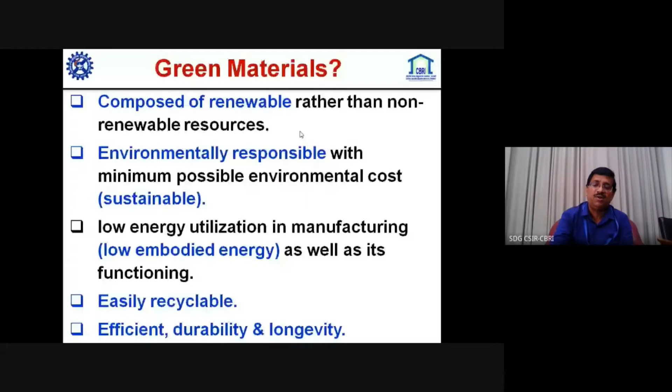So my main focus will be low energy utilization in manufacturing, so that the embodied energy could be minimum, as well as in its functioning. It should be easily recyclable, efficient, durable, and have long life. So those things are important. I'm not going to teach about that.

A different sustainability approach has been made, where environmental, social, and economic, all three come together, and that part is known as the sustainability part.

So if you look into the infrastructure as a whole, and sustainable goals, starting from the first goal, the total sustainable development goals are 17. From first to 7 come under enhancing access to basic services, and from 11 to 15, CSIR-CBRI is continuously working on promoting environmental sustainability.

So we are working a lot on waste utilization, new systems, so that less embodied energy material can be produced. And if you look from 8 to 10 and 16 and 17, those support inclusive growth towards sustainable development goals. So in these parameters, my talk will proceed.

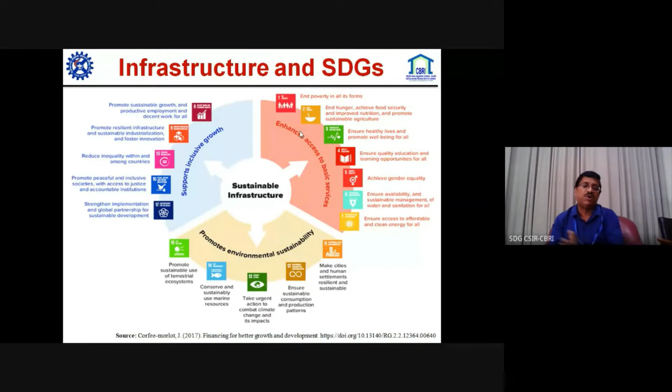What are the challenges before the construction sector? There are three major challenges. One is conservation of natural resources.

Second is energy conservation. So all the processes which have minimum energy consumption, those processes, and those technologies and materials which are energy efficient, that is the next issue.

Third one is reduction in greenhouse gas emissions. As you are aware, about 1 ton of cement production produces about 0.75 ton of carbon dioxide into the atmosphere. So that is a big issue, where every committee and people are working on how we can reduce greenhouse gas emissions from cement production.

A lot of work has been carried out in different parts of the country and the world. Initially efficiency was very poor - 1 ton of ordinary Portland cement production was producing about 1 to 1.2 ton of carbon dioxide, but it has been continuously reducing, and people are also working on different types of cementitious binders which require less temperature for calcination, using other sources.

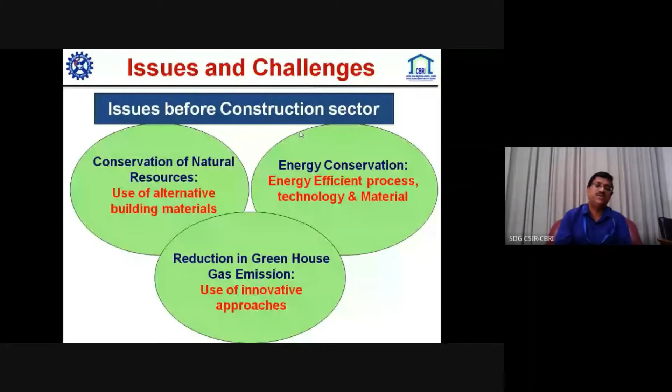My other colleagues will go into that in detail, so I'm not touching it, but definitely these are the concerns. Our main focus should be to reduce resource consumption, reuse resources, reduce environmental impact of cement production, and greater use of supplementary cementitious material.

That may be fly ash, silica fume, calcined clay, and other materials where less energy is involved during their production or application.

Recycle and reuse of construction and demolition waste, enhance the service life of structures - this is a major issue in our country, that we are making good buildings, good bridges, all these things, but the life of those structures is decreasing day by day due to poor quality concrete, construction problems, curing and other issues, and they start deteriorating at an early age, starting from 5 to 6 years, and within 10 to 15 years.

Corrosion and other issues have been emerging in a very faster way. So we have to look at whatever materials and technology we adopt, so that the life of structures can be enhanced, and overall the sustainability effects will be there.

Also research and use of emerging technologies - as we are aware, nowadays in our country a lot of work is being carried out towards the precast and prefab sector. Initially everything was cast in situ, and we were wasting a lot of materials, energy and other things. Right now, starting from bridges to buildings to highways to runways to pathways, everything is moving towards precast construction.

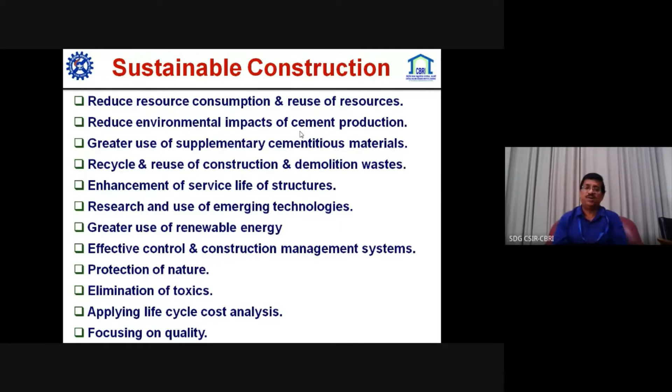And effective control of construction management system, protection of nature, elimination of toxics, applying life cycle cost analysis, and last but not the least, quality. So nowadays people are focusing much more towards the quality of constructions and other things.

I'm not going to just tell, but overall, if you look into the global energy demand and its consumption, particularly in Asia, it is increasing day by day. And we know a lot of infrastructure and other things are going on. So the main focus is how we can reduce the energy consumption in those areas.

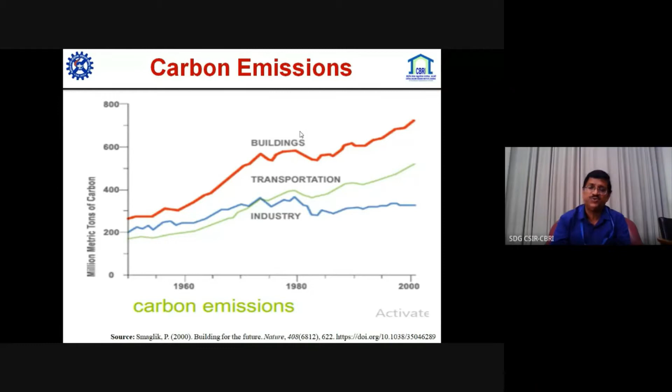Also, if you look into the carbon emissions in constructions, buildings, transportations and industries, it is all on the rising edge. So we have to reduce all those things in an effective manner. So coming forward, what we should do, these are the challenges. How we can come out with those challenges, that is the important factor.

So a major amount of carbon dioxide is being generated from calcination of limestone in cement clinker production. So that we have to minimize, and in CBRI we are continuously, our different groups are working on how we should address those things. Particularly if you look in India,

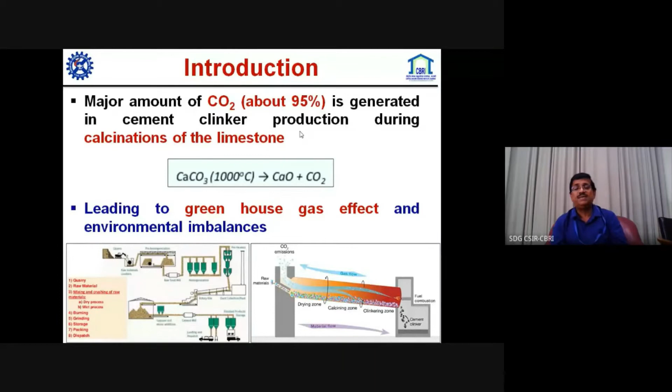NCCBM, they are working in a great way in this area, and continuously looking at what should be the alternative towards that. And that is the important factor, how we can reduce the greenhouse gas effect or emission of carbon dioxide into the environment, so that environmental balance can be maintained. So those are the important factors.

So what will be our course of action? Definitely our course of action should be that we should look for alternative binders, and that my particular group is working on. We have tried with the low heat calcination of lime sludge, which is available from paper industries and other industries.

Also my one student, she is going to present tomorrow on composite cement, where we are chemically activating steel slag, which is basically a very high crystalline material, and it has only been thrown away as garbage and not utilized.

So we are working, and other people will come. One of my colleagues, she will deliver on supplementary cementitious material. So that is the aim, how we are going to look beyond OPC, ordinary Portland cement, and how we have an energy-less consumed cementitious binder. So that was our aim.

As we are aware, I have already told that our reserves are very limited. If you look into the limestone, clay, shale, which is being used for OPC clinker production, Niti Aayog and all our MOEF and ministries, all those are behind that to reduce CO2 emissions and reduce the energy consumption in cement manufacturing.

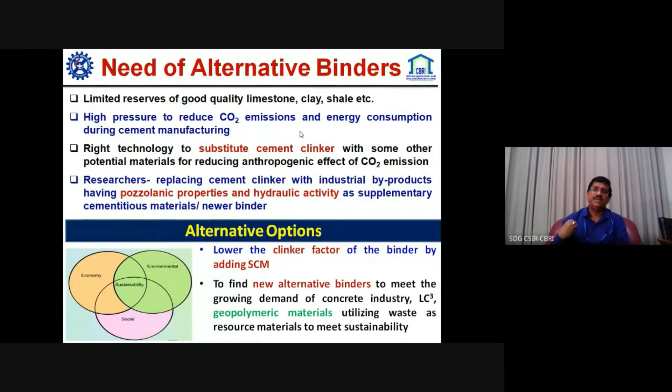Worldwide people are working on different types of binders, and work is going on, and somewhere in some European countries and also in China, some other cementitious binders were developed. But still, in our mind, we look into where will be the drawbacks. I have tried to list, not all, I have listed a few other types of binders, and also what may be the drawbacks, so that we can look and minimize that.

But if we are having good quality productions, that will be minimized. So if we talk about calcium aluminate cement, basically it is limestone and bauxite, and very limited calcination requirement is there. So energy consumption will reduce, and CO2 emissions will also reduce by more than 30%.

But sometimes people have observed, not all, that there was strength loss by conversion of metastable to stable hydrate. So during reactions, some strength losses were observed. Also, work has been carried out on calcium sulfoaluminate cement. It has been very good, but due to some free lime and other things, it has been observed to be a little bit expensive in nature, and in addition poor durability was reported.

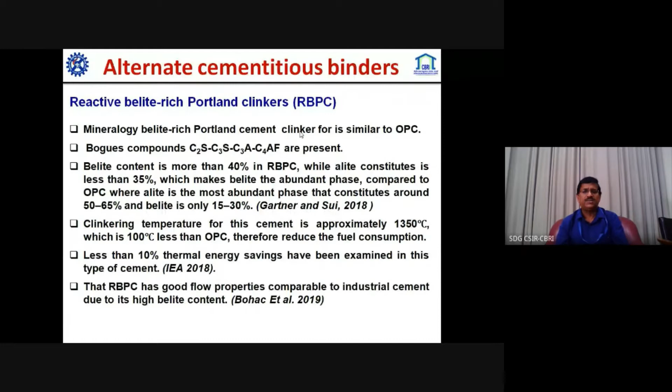Other cementitious binders are mainly working on belite rich Portland clinkers. We are modifying to C2S, which is belite, and reducing in an effective manner. By this way we are going to reduce thermal energy or energy consumption by less than 10%. And we are utilizing a high belite content. So this is some study people have carried out; our work is going on in this area.

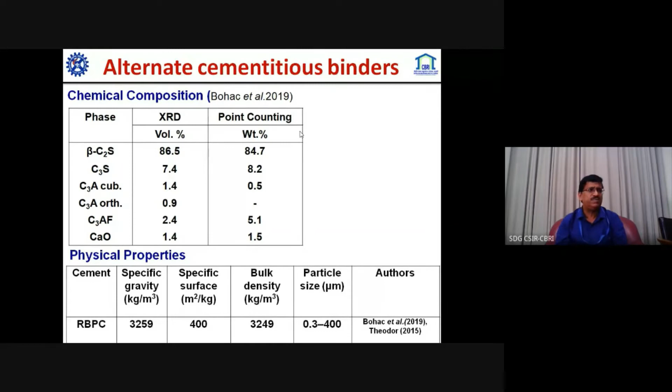Overall, if you look into the cement, its specific surface area is a little bit higher, but other things will be the same. So that is important. Another is belite ye'elimite ferrite, BYF cement. These cements are being utilized, clinker calcination is about 30% lesser, and it is rich in alumina. By this way our grindability, or energy requirement in grinding, will get reduced.

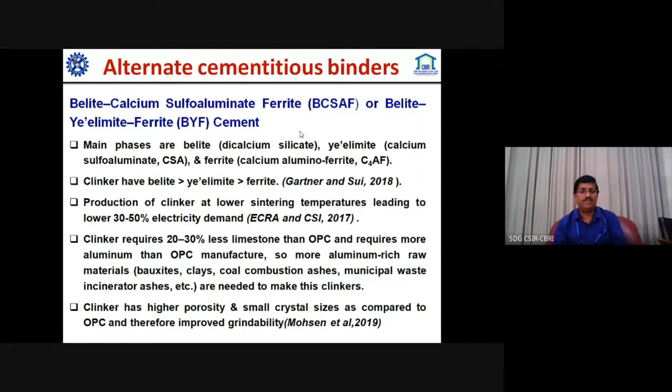So these are the different types of materials, and different researcher groups including CSIR and CBRI are working on them. As I said, this is magnesium silicate cement. It was developed way back in 1867, and basically it is an MgO based clinker with magnesium silicate.

This is abundantly available all over, and when it is utilized, it captures a lot of carbon dioxide from the atmosphere and sequesters it. That enhances the strength. So it is very advantageous, with very good water resistance and a relatively high level of CO2 sequestration in hydration products. That is why we have said it is carbon negative.

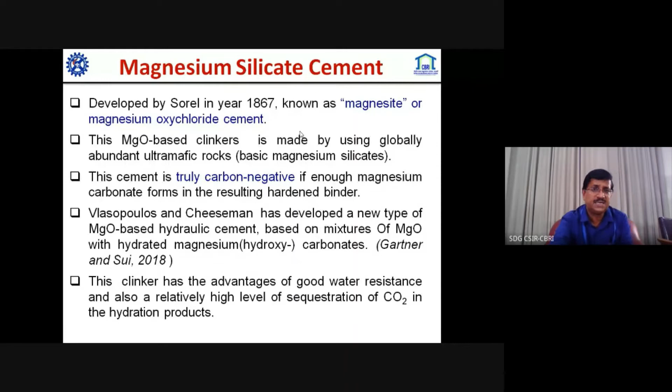There are other types of cementitious binders, I'm not taking much time, but different groups are working where lesser energy is required. So you should not get worried, because people are still fighting: you are not using OPC, you are using PPC, Portland Pozzolana cement, in place of OPC. No, there is nothing wrong with that.

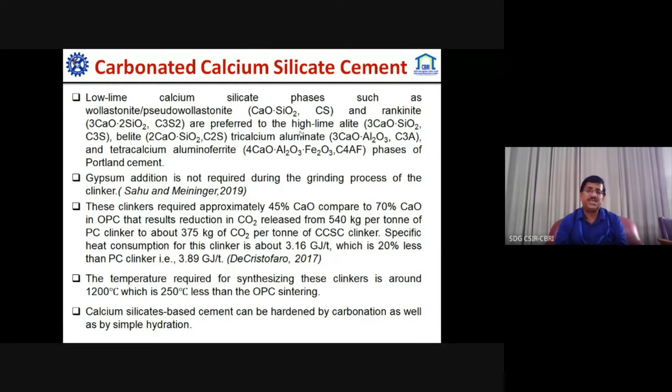If you are using PPC, it has a lot of advantages. If you are using composite cement, a lot of advantages, because overall durability and other things are improved. And in another manner, you are utilizing your waste or resource material available from different industries, and those things can be worked towards that.

This is important in all others where I have told we are using calcination or other processes where some energy is involved. But in the last 20 years, people have started working mainly on cement-free binders. One binder is a geopolymer, and it is nothing but activating aluminosilicate-based solid precursors, utilizing waste materials like fly ash, ground granulated blast furnace slag, and so on.

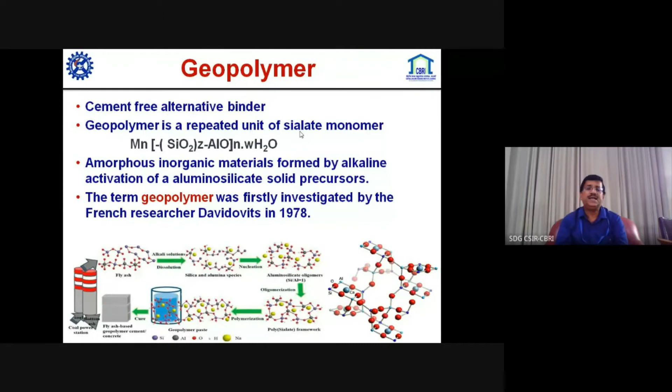Initially it was invented by Davidovits, who gave the term geopolymer, and they patented all those things. Usually people say this is an alkali-activated cementitious binder. So what is the basic difference between Portland cement and geopolymeric binder? That is if you know a little bit of chemistry.

In Portland cement, there is synthesis of high calcium oxide minerals, which are converted into the main products, calcium silicate hydrate, calcium hydroxide, and some intermediate products from the hydration process. In calcium silicate hydrate, there is a hydrate, so mainly water molecules are attached. So in this process, we require water during hydration.

Whereas in geopolymer, it has nothing to do with hydration. It is a polymerization process, but polymerization of inorganic material, minerals which have sufficient silica and alumina content, and in this case water is released during the chemical process. So we don't need any water; rather, if you are heating it, strength will be better and more polymerization reactions will take place.

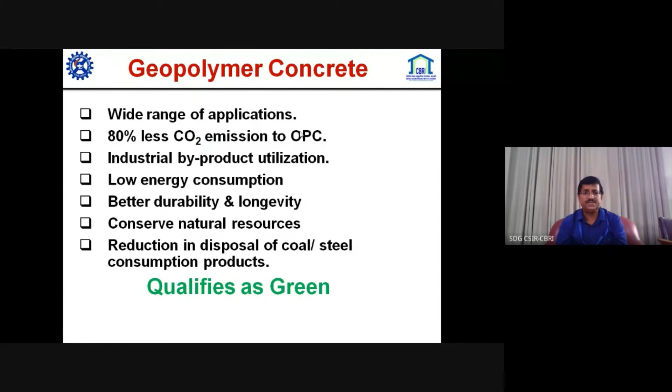It is qualified as a green material, with about 80% less CO2 emission compared to ordinary Portland cement. And it directly utilizes main byproducts like fly ash, ground granulated blast furnace slag, red mud, and others, which are rich in silica and alumina. Red mud is also very good; people are working very nicely with it making geopolymer binders. It has very low energy consumption and durability. We have worked very extensively on this at CBRI, on its chemistry and its utilization in the civil engineering field.

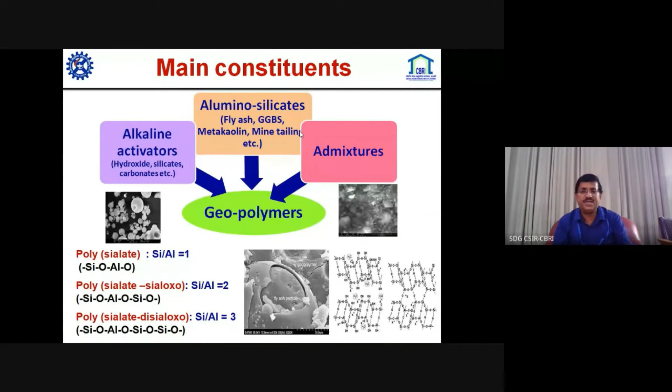Mainly the activators involved are hydroxide and silicate. Usually people use sodium hydroxide and sodium silicate. The other ingredients for making concrete are the same, coarse and fine aggregate. Some admixture is required to modify the rheological behavior, and those have been used with good results.

It has a lot of advantages compared to the conventional concrete system. It is cement free, its strength is very high, from 30 MPa to 100 MPa, and within 1 or 2 days we can have more than 20 MPa. Shrinkage is minimal, with low permeability. It is very good in alkali and sulfate resistance, in marine or coastal structures. It has low thermal conductivity and excellent fire resistance. Concrete starts deteriorating after 200 degrees centigrade, but this has been found very good even up to 800 degrees centigrade.

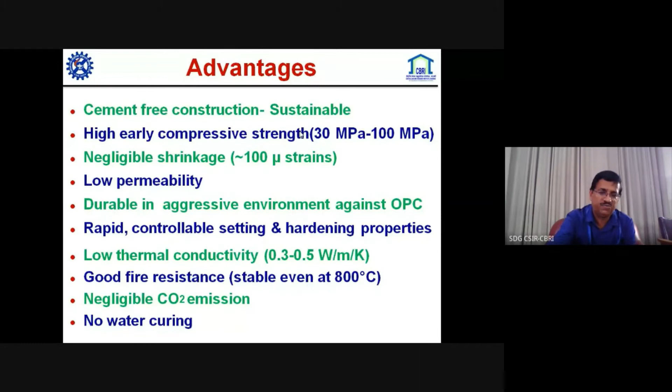And last but not least, we don't require any water curing, which is the biggest issue in cement-based concrete or mortar, where we have to do water curing or moist curing continuously. We use fly ash, and fly ash is being used in different areas, so this is sustainable. If you look way back, in the early 90s it was considered a toxic material, but nowadays it is a resource material, and more than 65% of fly ash is used in different applications, like making bricks, mine reclamation, and road construction, particularly embankments.

Mainly, nowadays it is being used as cement, where we are using it in making Portland Pozzolana cement. In other places we are using it as a performance enhancer by 5%, which has already been allowed in OPC by the code. So for all cement industries it's a big boon. And right now good quality fly ash is not available, rather pond ash and other things.

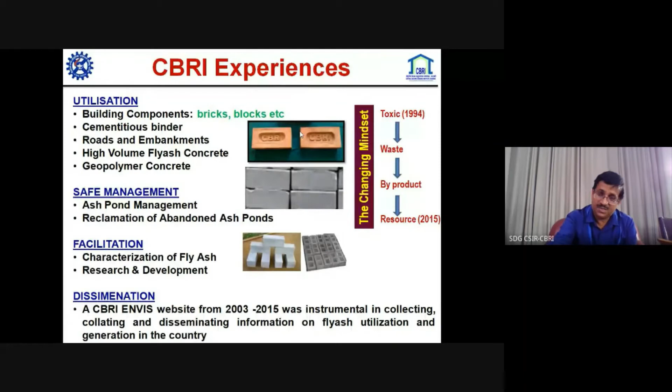CBRI has extensively worked on everything from bricks and blocks to cementitious binders to roads and embankments, and high volume fly ash concrete. And nowadays we are working on utilizing it as geopolymer concrete. So fly ash bricks, embankments, road construction, soil stabilization, precast blocks, mine filling, we have done.

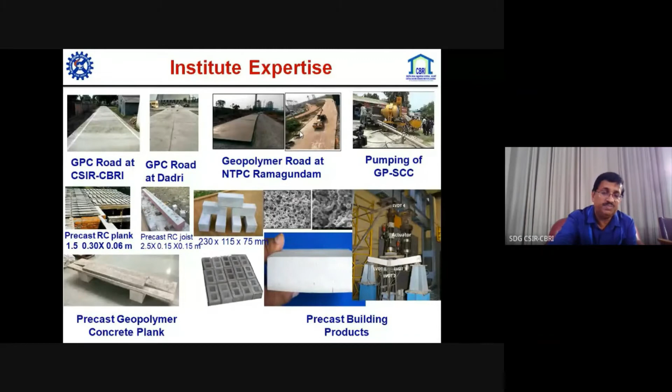Also, by activating fly ash, we have made a road, we have made building blocks, we have made self-compacting concrete, we have made beams, columns, all those things with geopolymer concrete, and also building elements, which are planks, joists, and other prefabricated elements. A little bit on how it works, what is the basic.

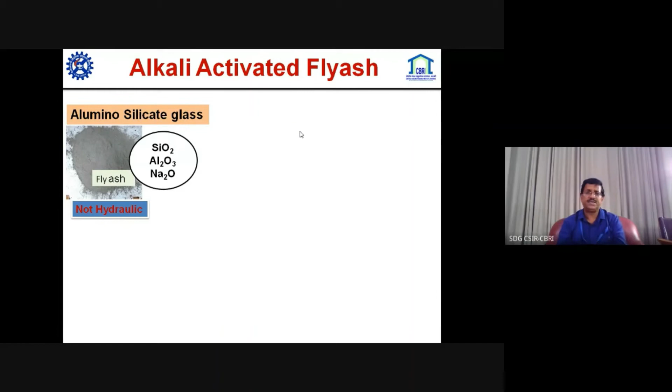Basically fly ash has silica content of more than 35 to 60%, alumina content, sodium oxides, and all those things. So we are activating it with sodium hydroxide and sodium silicate, usually in a very high alkaline medium. And also, from sodium silicate, if there is lesser silica content, we are utilizing it and, giving 60-degree to 80-degree temperature, converting it into geopolymer, which is nothing but a sodium aluminosilicate polymer.

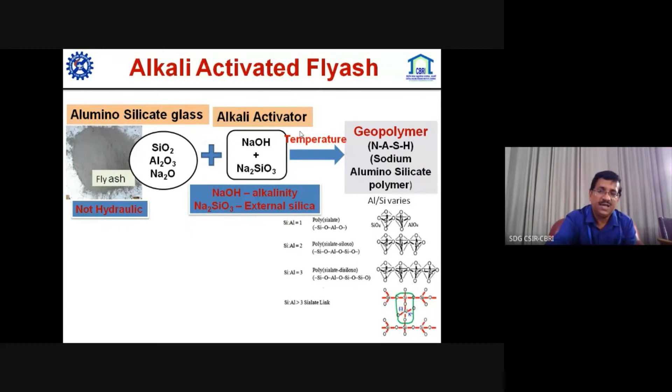But if you have to do it at ambient or normal temperature, you have to add some energy, some temperature should be enhanced. So we are adding GGBFS up to 20 to 25%, which initially converts into calcium aluminosilicate polymers, and because these exothermic reactions generate energy, we don't require any heating during making the binder. So this is the mechanism: dissolution, gelation, reorganization, polycondensation.

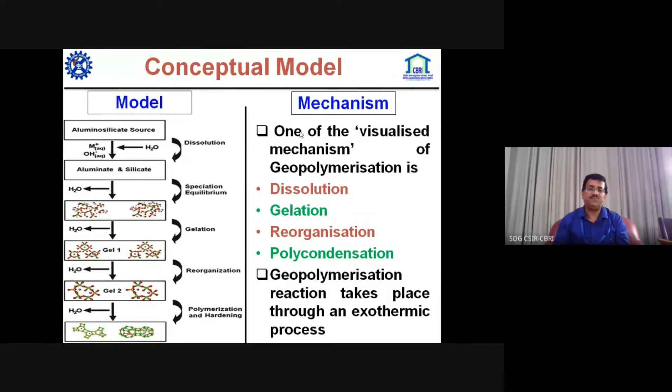In the dissolution, we are mixing sodium hydroxide or sodium silicate with water so that it is in aqueous form, and it will be added into our aluminosilicate source, that is fly ash and GGBS, and only water is added in making our source activators. And in every reaction, if you look into it, water is coming out from that reaction. So we have to look at how that water should be utilized.

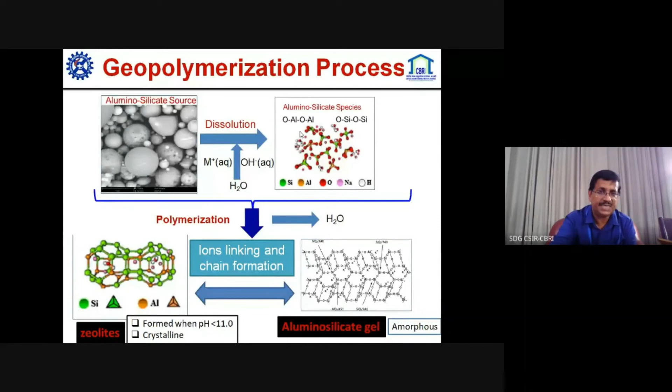These are the different processes. It is important that dissolution should be carried out in a very high alkaline atmosphere, with a pH of more than 12, so that it is converted into amorphous aluminosilicate gel. Otherwise it will be in a crystalline form, and strength and other things will be lesser as compared to the amorphous material. So that is important, and it is very important to address.

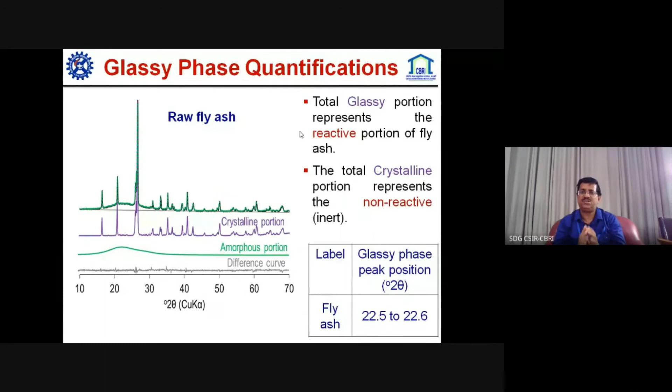We should have sufficient reactive oxide available in our precursor, meaning fly ash and GGBFS, so that it can react with our chemical activators, sodium hydroxide and sodium silicate. If it has lesser reactive oxide, it has lesser reactivity. And you should understand the morphology if you are developing this type of binder. Mainly, glassy content should be more than 35%, so geopolymerization will be better. Usually, if it is higher, about 55-60%, geopolymerization will be more.

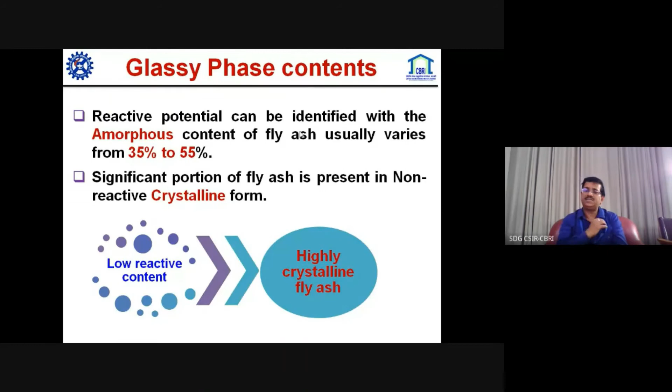So if the fly ash has low reactive content, it will not give better geopolymerization, and our material will be poor, meaning our concrete or cementitious binder will not be good. So that is important to know.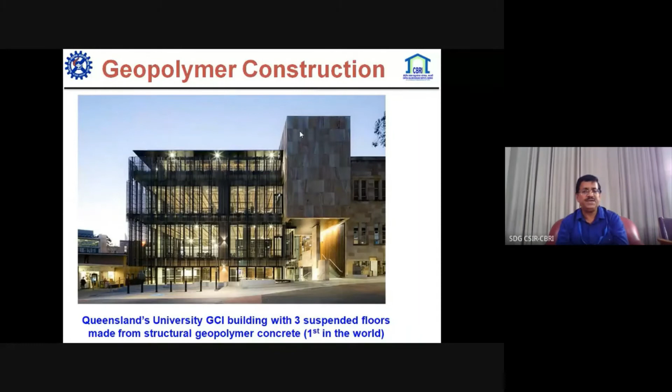Good quality availability of raw materials. Basically, if there are changes or variation in raw material, its properties are going to change. So you should be cautious, and overall, in the minds of people, this is going to be a good material, and they should start working on it. Cost economics, yes, it is coming out about the same as OPC.

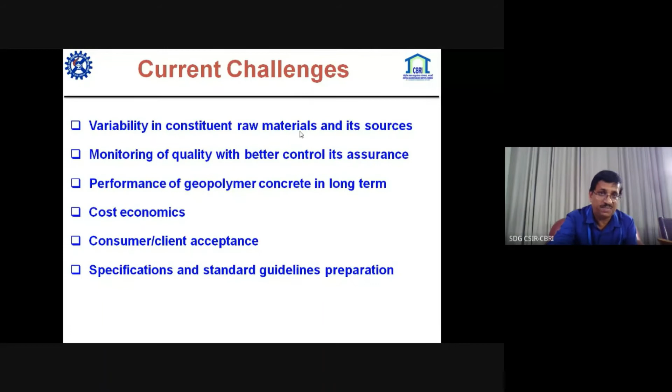So if you don't have much saving, about 10 to 15%, people say, if we are well conversant with ordinary Portland cement utilization, why should you go for this type of material? Definitely, but nevertheless, it is a very green material, and it will help not only to reduce the energy demand, but also emissions of carbon dioxide, saving our environment. So those are the important factors why we should use it.

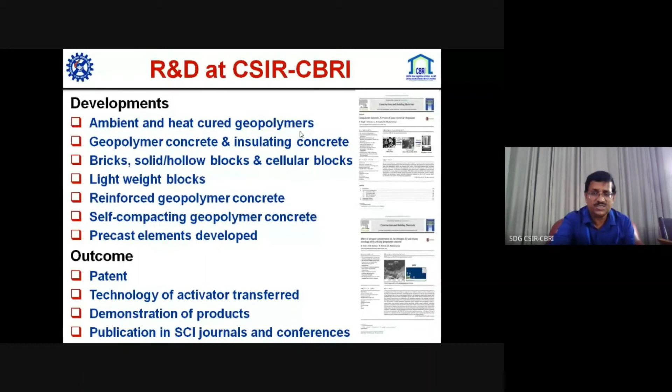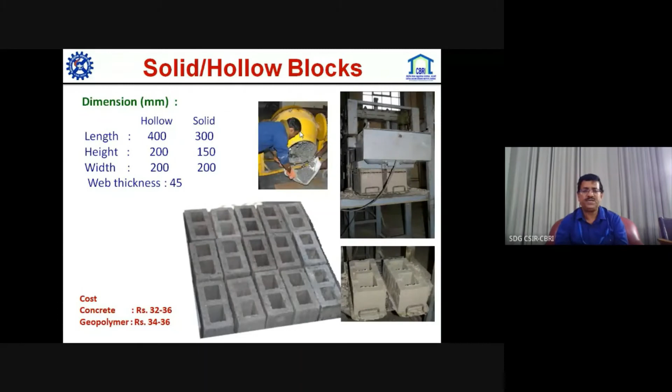So at CBRI, we have worked on different parameters. We have developed technology, transferred it, demonstrated the product, patents, all those things, and you can see our research papers are coming. We have made the geopolymer brick, and the cost will be comparable to the solid block brick with this geopolymer. So it is cement free, and we are utilizing a waste material in it.

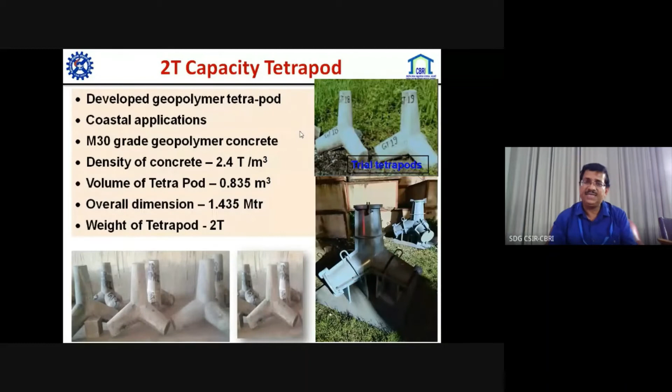And these are the areas where we have worked on cellular lightweight material with fly ash, because in cellular material we used cement previously. If you look into the AAC block, autoclaved aerated, and other things, we have done it with the geopolymeric material. We have made tetrapods, as I have told, that are very good in the marine environment, and these tetrapods are energy breakers, so they are being utilized. Also, structural element studies have been carried out and found similar results.

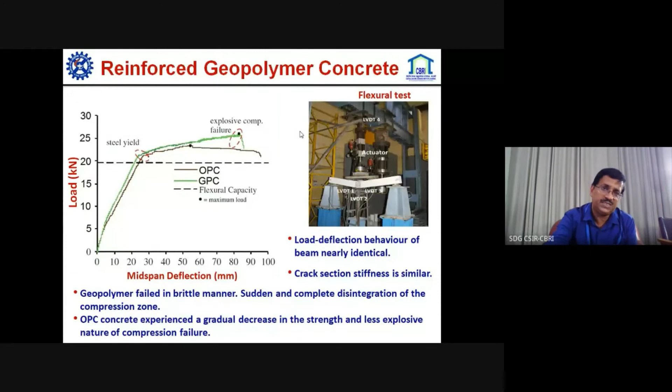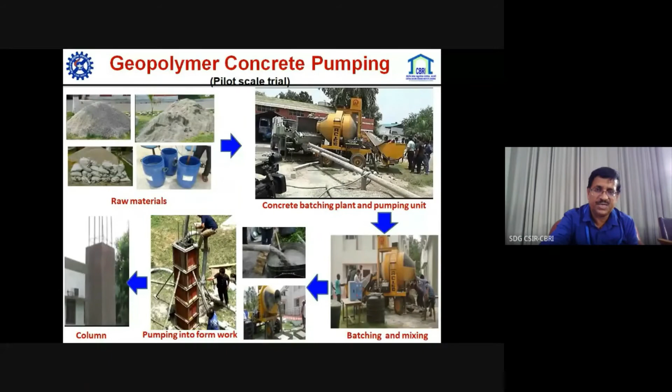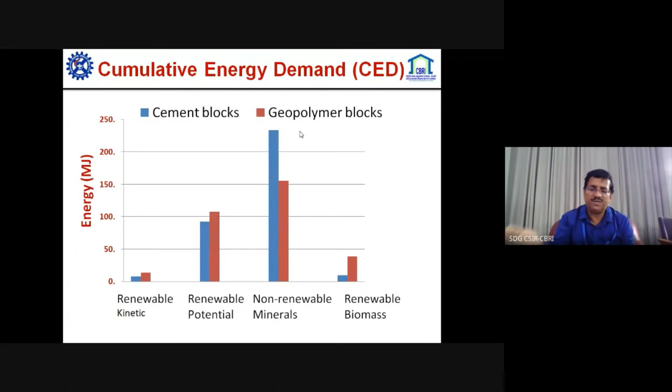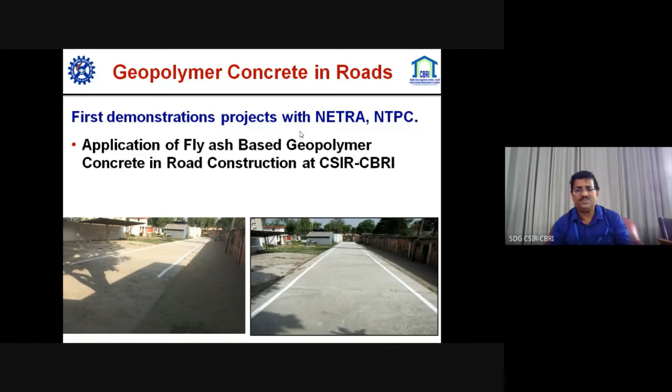We have worked in a systematic way at CBRI, and we have transferred technology to National Thermal Power Corporation, utilizing it in their roads, their paving blocks and other things. And they have demonstrated it in different places in the country. So if you look into that, the same material has been used, only in place of cement we are using fly ash, ground granulated blast furnace slag, and alkali activators, that is nothing but sodium silicate and sodium hydroxide.

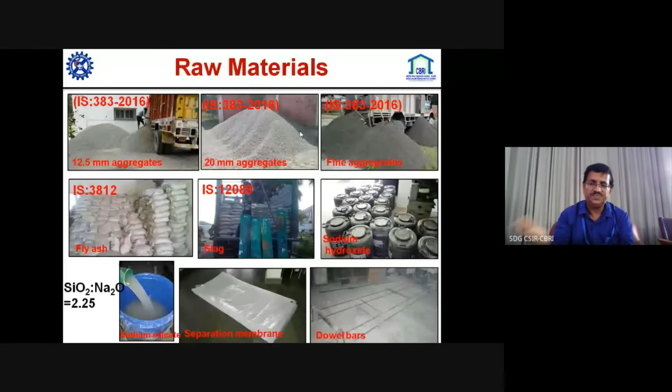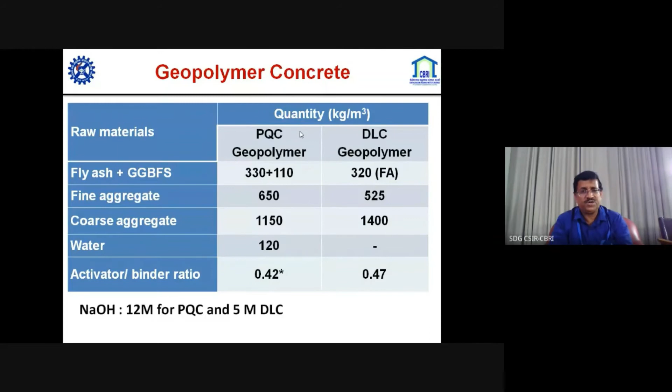So for other properties we have done a mix proportion. This is sodium silicate, you can see, and sodium hydroxide we achieve with the flakes, and we make it, and we go with the activator. So these are the road mix proportions. Here we can use DLC with fly ash only, because we don't need very high strength. But if you want, you can use 10% of GGBFS. And in PQC we have used 330 kg of fly ash and 110 kg of GGBS. Fine aggregate was 650 kg, coarse aggregate was about 1150 kg, water was 120. Activator to binder ratio was kept at 0.42 in PQC.

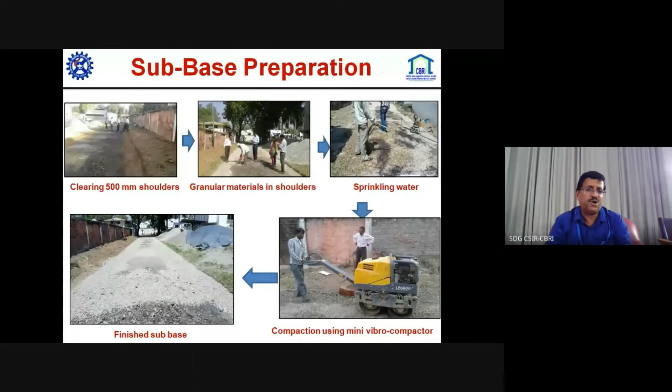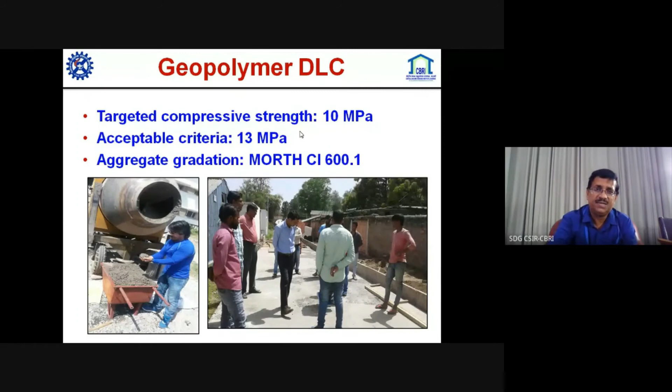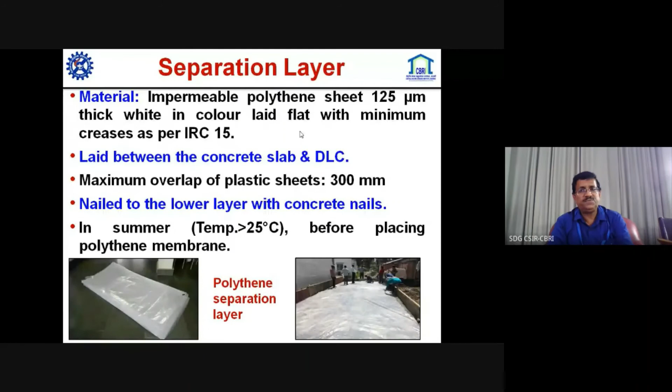This is road construction, actual preparation of subbase, so clearing of shoulders, granular material, sprinkling of water, fines, and then compaction with the mini roller. Then laying of dry lean geopolymer concrete as per MORTH specification. So this is being made. This is the laying. This was carried out way back, more than 4 years back at CBRI. And then after that, the DLC has been laid. And then after that, a polythene separation layer of 125 micron has been placed and fixed.

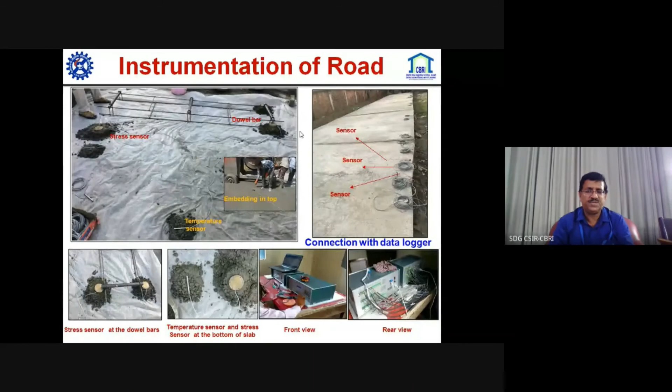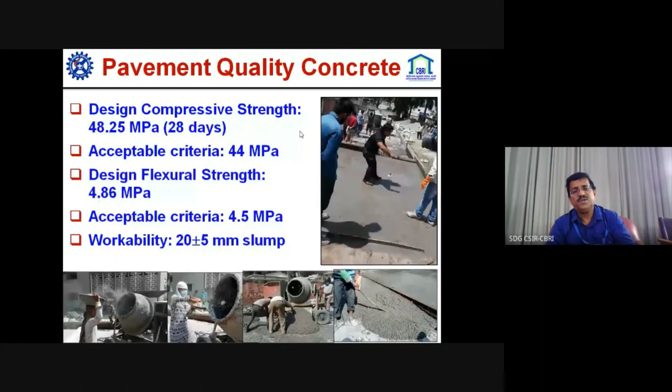Then, because it was the first road construction, we instrumented it with temperature sensors, vibration sensors, and strain sensors. So all those sensors have been put along the roads, and in the same way we constructed a road with the geopolymer concrete, and two we made from OPC, ordinary Portland cement based. These are a few photographs of the laying process. This is texturing. We don't have a mechanized machine, so we have done it by hand.

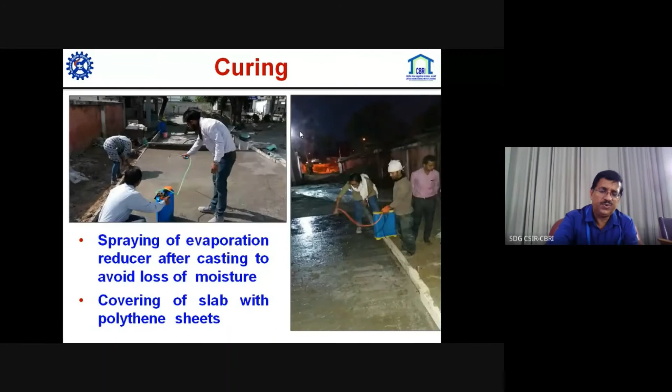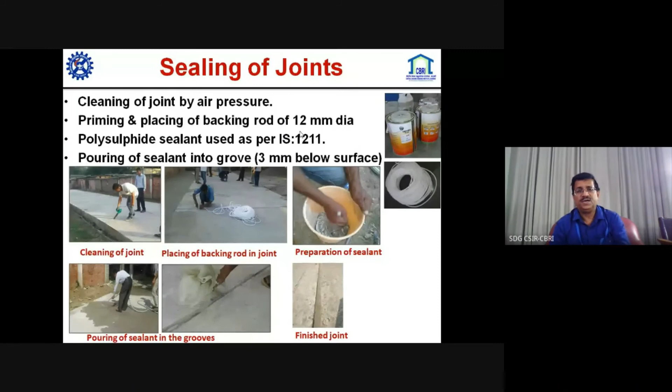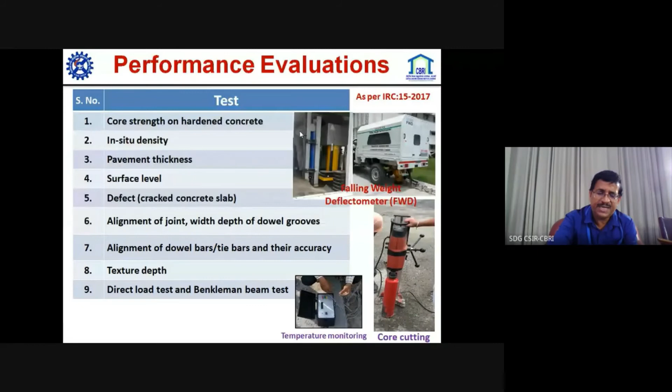This is spraying of evaporation reducer. Then transverse joints have been made, and the backing rod of 12 mm dia was placed, and then filled with polysulfide based sealant material over the top, 3 to 5 mm in height. So this is the road construction at CBRI. After getting those results at CBRI, we have studied further, and full-fledged roads have been made.

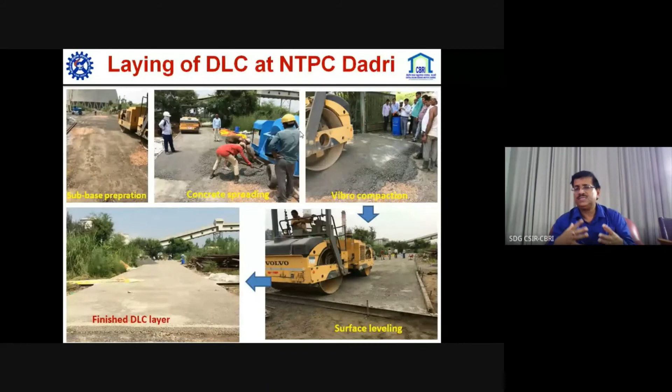We have used vibro rollers for better compaction of dry lean concrete, and by this way the strength got enhanced to about 20 to 24 MPa. So it's nothing but a roller compacted geopolymer concrete, and this is the same way we have carried out. This is the road that has been made.

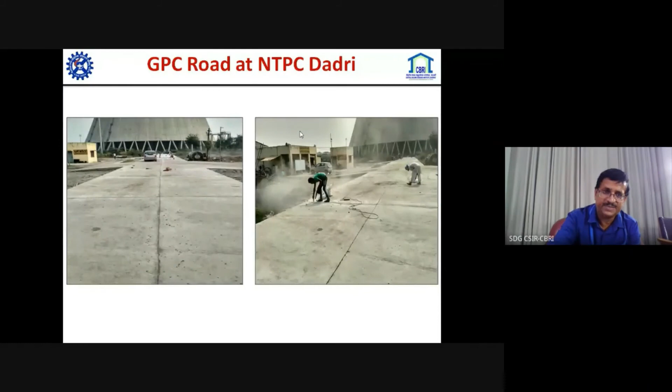This is another road that has been made, in Dadri, and it's a bigger road, and we have made a lot of things. You can look into our YouTube, our reports, our research papers, and it has been accredited by IRC also. Very few people are aware that BIS, Bureau of Indian Standards, has come up with the code on geopolymer products. So that is there.

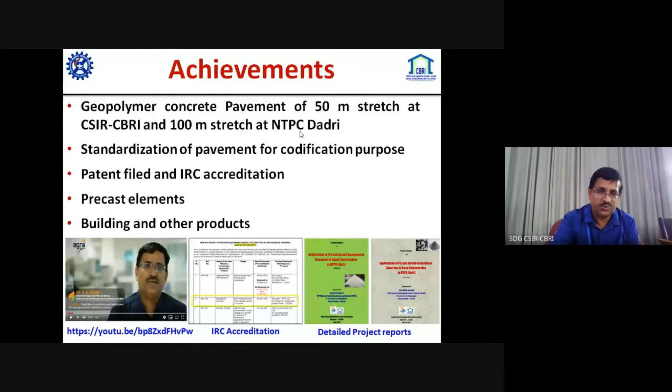Another thing, because we have limited time, I would like to quickly show. If I'm talking about sustainable material, without talking about recycling and reuse of construction and demolition waste, it will not be solved. So I will look into that.

Frankly, when I started working way back in 1997, Professor R.K. Dhir of University of Dundee visited. At that time I was at SERC Ghaziabad, and he said, "You work on this area, it will be the future, and in UK we are working and improving the properties, etc."

So at that time I started work and published one paper in 98 in one conference, but I could not get further, because the strength reduction was about 15 to 20%, and I thought, "Okay, how are people going to use it?" At that time you didn't have a processing system. We had installed a very small crusher in the lab. But nowadays, very good quality crushers have come up.

That is impact and cone crusher combinations, which remove the adhered mortar, the mortar which sticks with the coarse aggregate at the time of crushing. So that is a major issue. By removing those, we can get a good quality coarse aggregate as well as a good quality fine aggregate

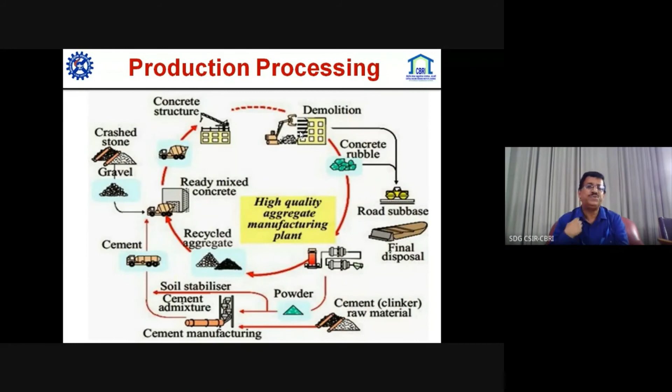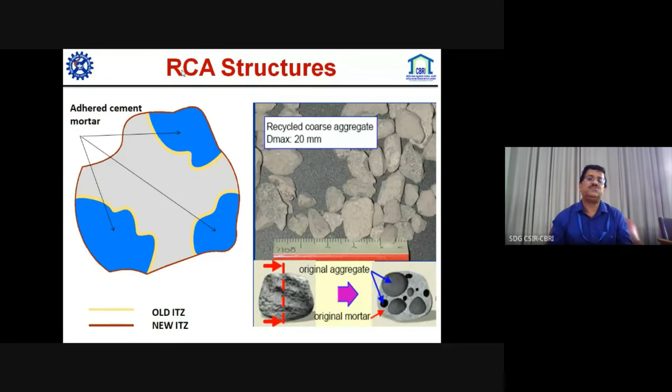So if you are using it in the concrete, the cement paste will try to improve it and you can get good concrete, and that has already been added into the code 383 2016. And recently we had a meeting, and we tried to utilize this type of coarse aggregate in large quantity, looking into the sustainability of construction. So this is how it looks.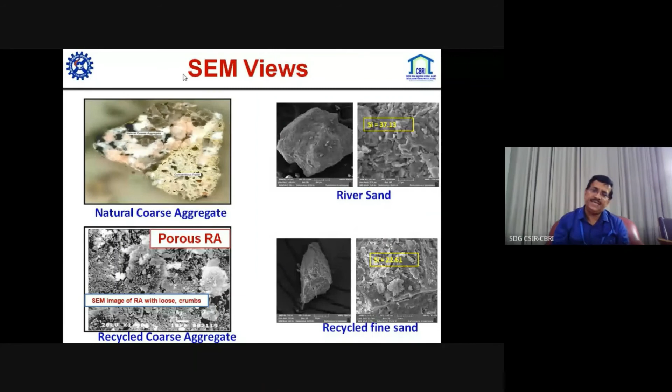If you look into the same view, those areas will be porous compared to natural coarse aggregate. And if you compare the sand, the recycled fine sand is a little bit flaky and has some adhered portion. So we worked continuously on the technology to remove those parts, and we have developed a concrete block and different types of building elements.

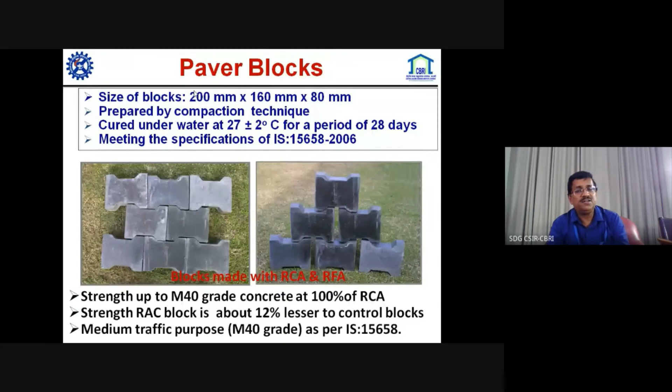Not only this, we have worked on utilizing the recycled sand, recycled fine aggregate, in place of natural sand. And we have carried out extensive research at CBRI by my PhD student, Dr. S.K. Kritika. She has done it, and we have found that it can be utilized.

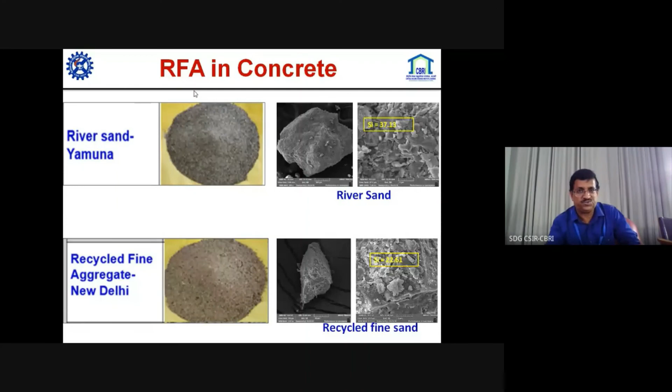We have compared the result with the Yamuna River sand and other sands, and we found that it has worked very efficiently. If you are replacing the natural sand by 30%, there is no problem. By the natural way you are working, you can go ahead with this one. So these are some views and the area.

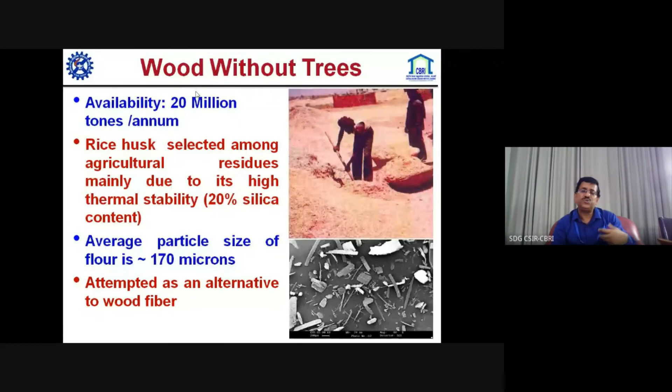Also, in my division, particularly on polymer plastics, we have worked on making rice husk into wood. This is known as wood without tree. So we have made a pellet, and this technology has already been transferred and is being utilized.

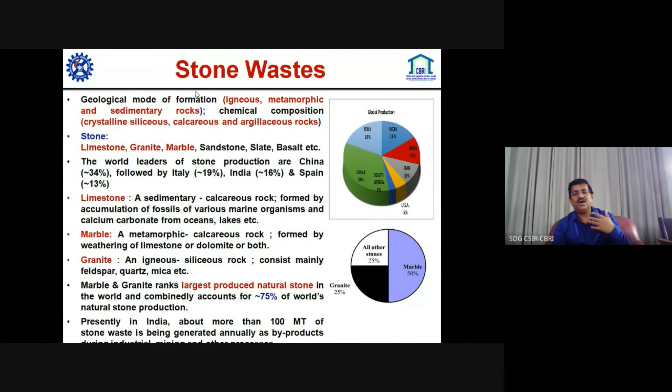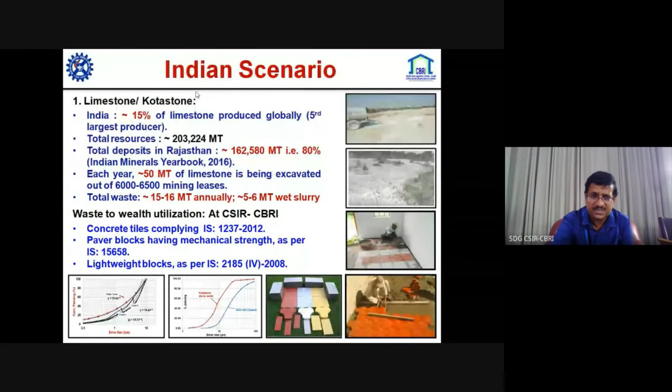Similarly, CSIR CBRI has worked on stone waste from Kota stone, marble stone, and different sources. It is used in different fashions: as a fine aggregate, as a cementitious material replacement, and as a performance enhancer in cement. Different studies have been carried out, different products have been made, and those technologies have been transferred to different industries.

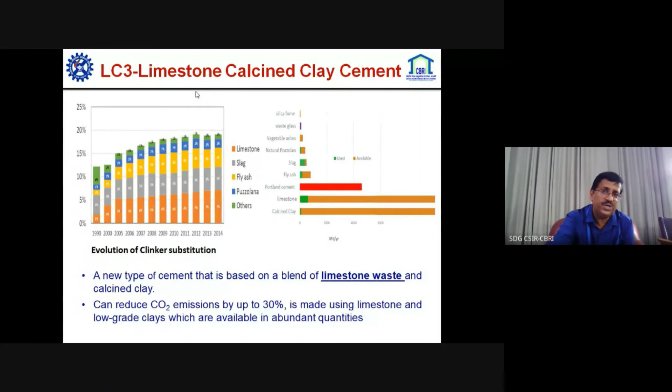In CBRI, my group has started working on LC3, limestone calcined clay cement, which people all over the world are working on, including IIT Delhi, Bishnoi, Manu Santhanam, and others at IIT Chennai. This is a low energy cementitious binder. I'm not taking much time on this because my research scholar is going to tell how we are utilizing slag as a coarse aggregate, as a fine aggregate, and as a cementitious binder.

If you look into it, in India a lot of quantity, about 16 million tons of slag, is produced every year, and by 2031 the government is targeting steel production of more than 300 million tons, so there will be a huge quantity of slag. We are working with the Ministry of Steel in a big way on fine aggregate and cementitious binder applications.

So she is going to present this, and our research has also resulted in 3 research papers on this type of activity. Mainly, if you look at LD slag, why it is not being used as a replacement like ground granulated blast furnace slag is because of the high level of crystalline material, which is more than 55 to 60%, sometimes coming to 58% or 62%. It has binding phases, but it could not be used.

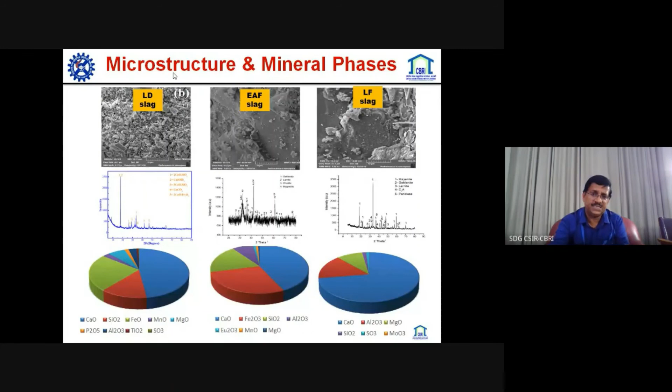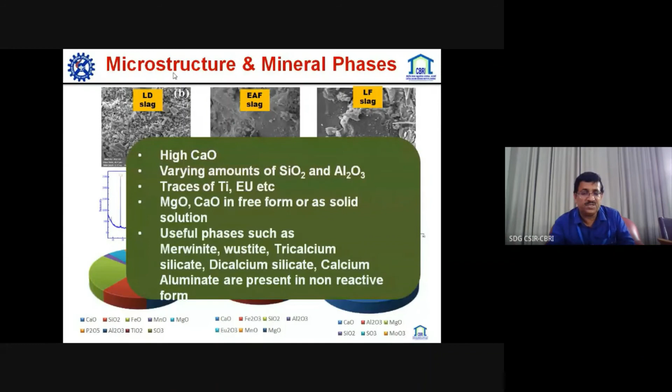Similarly, electric arc furnace slags and ladle furnace slags - we are working on different types of steel slag at CSIR CBRI. We have already been awarded a project by the Ministry of Steel, and also have a project with JSW Steels, and recently we are talking with Tata. We have activated it by different ways: hydrothermal treatment, sizing, chemical activation. In the laboratory, we have been able to chemically activate up to 30% of this steel slag, making it a cementitious binder. Our aim is that since it is not being used, by activating it we are utilizing it as a cement binder, which will be a big thing for industries.

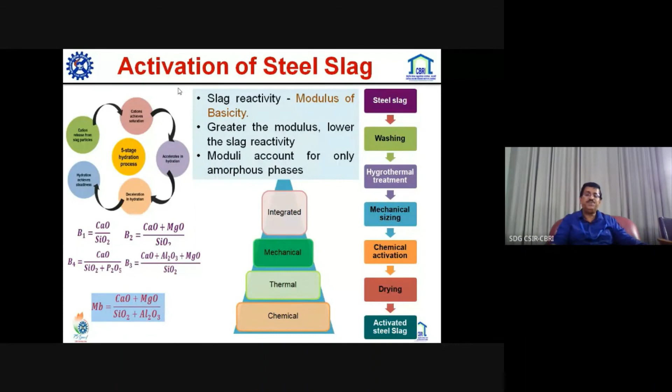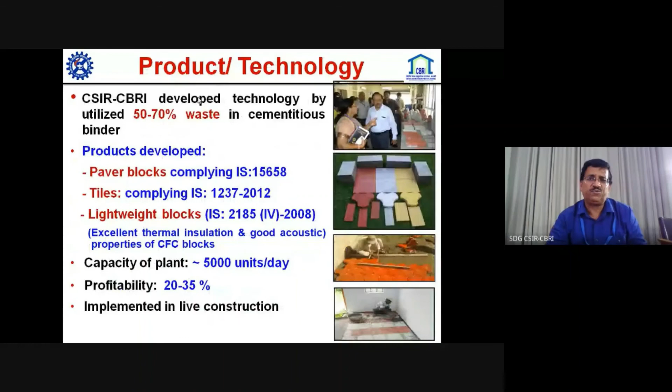Similarly, we are working with paper industries, converting lime sludge into cementitious binder, activating it and making brick blocks and other things. Right now we have made putty, low cost putty, with that lime sludge. Similarly, we have worked on Kota stone - I'm not taking time on that. So we have demonstrated these technologies.

In these words, I am concluding my presentation, so that you should have a good lunch. Sustainable construction is the need of the hour, utilizing green materials or sustainable materials.

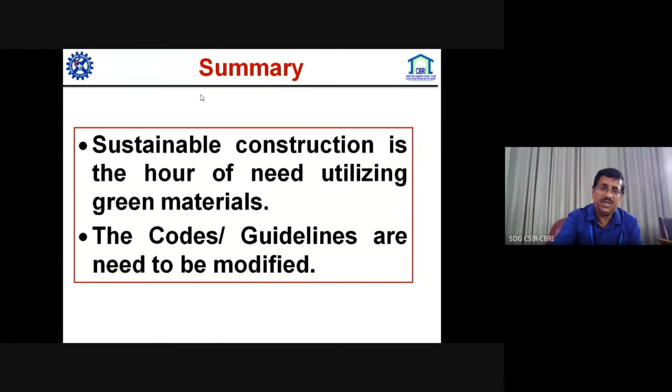I have been in several Bureau of Indian Standard Committees. We are always looking at this. Recently, we worked very exhaustively on how we can use steel slag as a fine aggregate, steel slag as a coarse aggregate, and steel slag in cementitious binder. So all these things we are working on, and we will definitely be able to do this.

I finish my presentation with this quote from Oliver Holmes: '100 years after we are gone and forgotten, those who never heard of us will be living with the results of our actions.' So try to utilize waste material, try to utilize green material, try to utilize other materials and renewable sources in your constructions. Thank you very much.